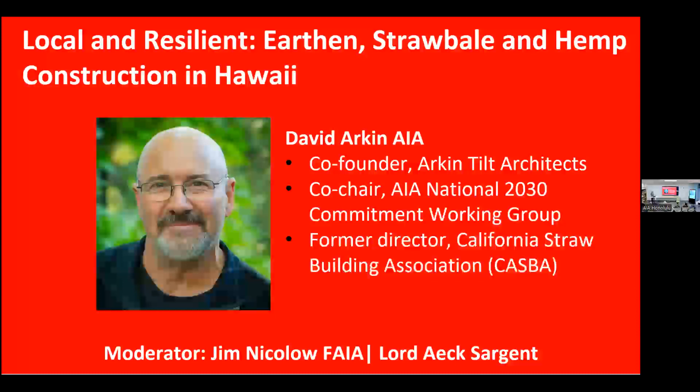As I was staring at the screensaver you put up, I realized the only mistake I made in preparing for this is not being there in person, as you suggested, which would have been much better. What a beautiful place you all live. I'm based here in Northern California, which is also beautiful, as there are many such places around the planet. And it's our job to protect these.

It was fun listening in on the opening. I felt like I was sitting at an AIA East Bay Committee on the Environment meeting with discussions of firm issues, all-electric, and lots of other good things we're all working on towards a better planet.

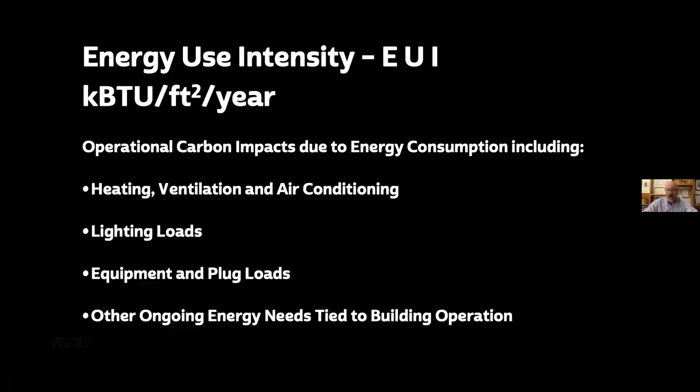I wanted to cover first briefly the operational side, or energy use intensity, which we're measuring as part of the AIA's 2030 commitment. That, of course, is carbon impacts due to HVAC, lighting loads, and other equipment and plug loads—the energy needs of our buildings on a day-to-day basis.

We again invite all of you, if you haven't already, to sign on to our 2030 commitment. I recently learned that there is a COTE chapter where, at one of their local gatherings, not a single person was a signatory to the 2030 commitment. I'm not going to name that chapter—I'm not going to shame them, nor you—but I do hope everyone becomes a signatory.

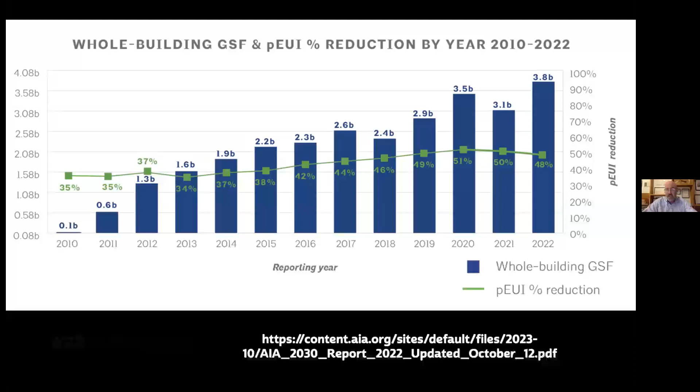This is from our most recent 2022 reporting year, where we achieved overall a 48% predicted energy use intensity reduction, over 3.8 billion square feet of buildings reported. You can see the progress we've made in increasing reporting in the program, and we're hitting a bit of a plateau around 50% reductions. We're hoping that as building electrification and a cleaner grid become priorities, those percentage reductions will continue to increase.

But net zero energy is a target we all have. Here in California, it's actually mandated that all new residential units achieve net zero energy through rooftop photovoltaics and a clean energy purchase agreement. So some of our zero net energy strategies—these are not anything new to any of you.

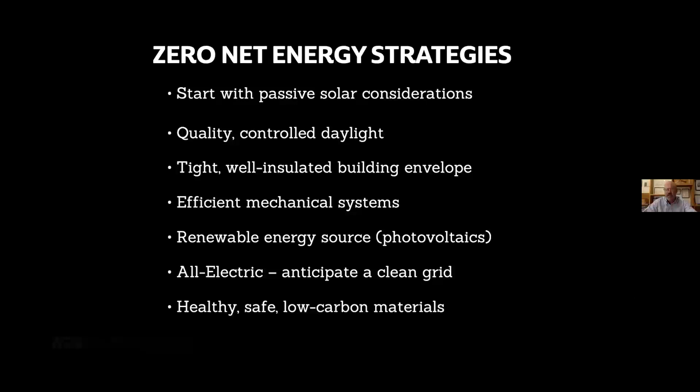Good building envelope, controlled daylight, ventilation—key in your particular climate—efficient systems, and healthy, safe, low carbon materials. That's really what this presentation and discussion tonight is all about: how can we achieve reductions in the 11% of our emissions accounted for in building materials, what we call the embodied carbon intensity, measured in kilograms of CO2 emitted per meter squared.

Embodied carbon is effectively the stuff that our buildings are made of, from the impacts of the raw extraction of the material, whether it's digging it out of the ground or cutting it down as a plant, the transportation of it, the processing of it, and of course energy used while it's being put together as a building.

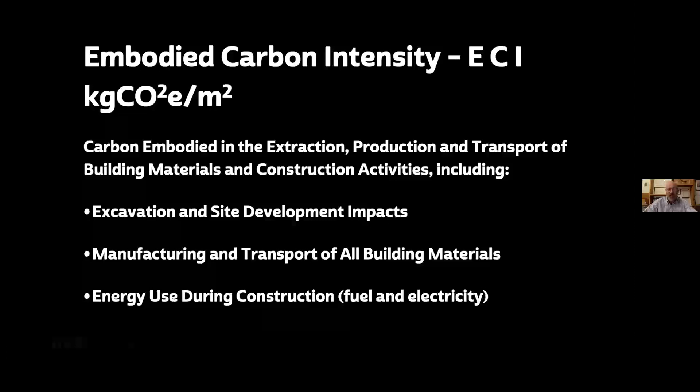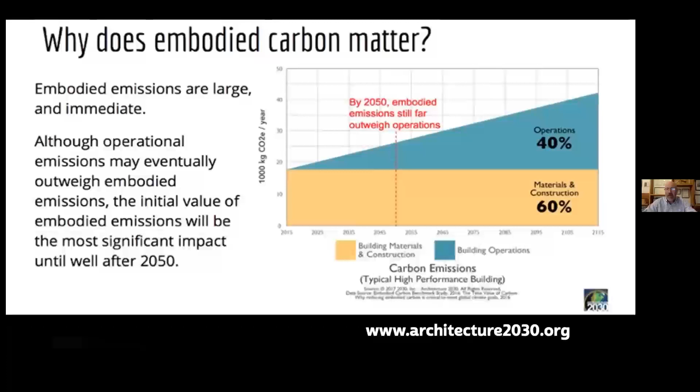It's a good question, why does this matter? For the past 30 years, we've made remarkable progress in increases in energy efficiency and integration of renewable energy systems in our buildings. But as we've done that over time, those decreased impacts of the operating carbon mean that the materials and construction are everything. Perhaps more critically, those impacts are up front—they happen before the door is opened and the building is being occupied. So again, as we decrease the operating impacts, everything is frankly materials and construction.

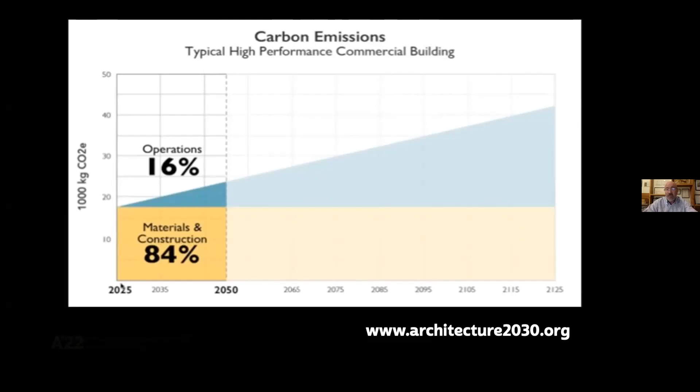As Jill noted, when you're in a remote location and much of the resources are being brought there from faraway places, there are transportation impacts. Granted, transportation of materials by ship is one of the most efficient ways that we can move things, but still, taking advantage of what's right there at hand is, of course, even better.

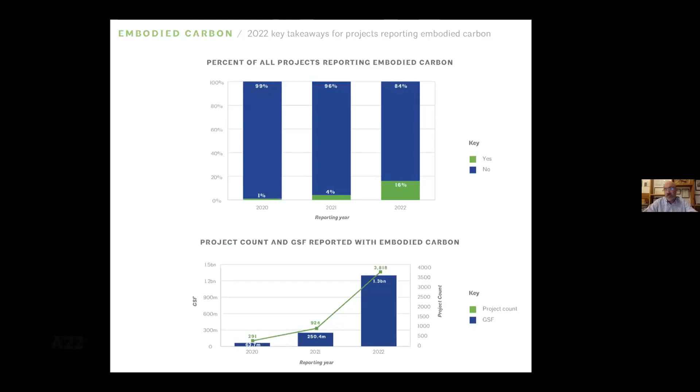Just to come back to our 2022 By the Numbers report from the AIA 2030 Commitment, the average building being reported—and granted a lot of these are large projects by large firms—is looking at about 550 kilograms of CO2 per meter squared average. Low-rise buildings average closer to 300, and single-family residential closer to 200 each. So we've seen a steady increase over the 3 years that the commitment has invited firms to voluntarily report their embodied carbon, and a fourfold increase in the number of projects reported from last year to this year.

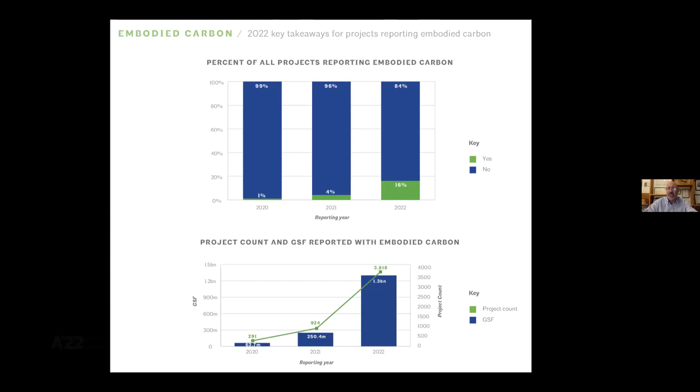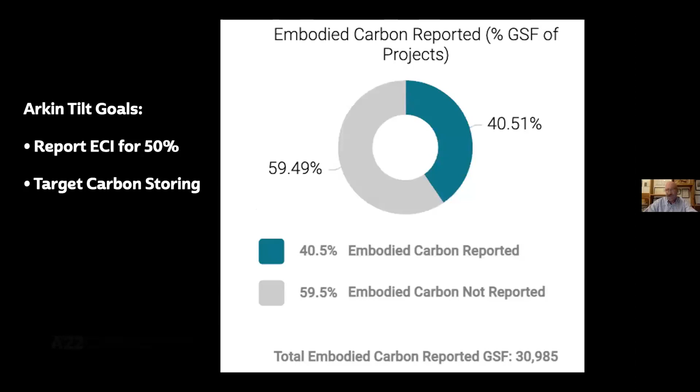Our own firm has set a goal of calculating embodied carbon for at least 50% of our projects, and we are aggressively targeting carbon storing for at least one of ours. I'll just note right now, it's extremely difficult to get to that place, but it's one that we really need to target and get to.

Just a very brief discussion on some of the tools that are available. We're looking at the life cycle analysis of our buildings, and it's really only a couple of the B phase—the operational energy and water use—that are not embodied carbon. Everything else is all about the materials, getting them to the site, repairing things over the life of the building, and then what happens at end of life. These are just a quick glance at a few of the tools that are out there in case you're not familiar with them.

The EC3 tool was recently brought into the Carbon Leadership Forum, and Building Transparency manages it. It's free and one of the most popular ones that integrates with Revit and other higher-end CAD programs. In our firm, we use Vectorworks, and they actually have a plugin for embodied carbon, and also the Beam tool, which is at a right scale for the smaller scale buildings that our firm is typically engaged in. Just wanted to give a quick glance at one of these.

This is the Building Emissions Accounting for Materials Estimator from Builders for Climate Action, and our friend Chris Magwood, who is now also with the Rocky Mountain Institute.

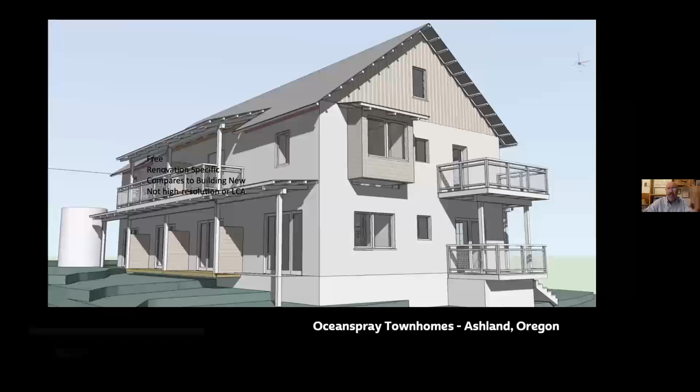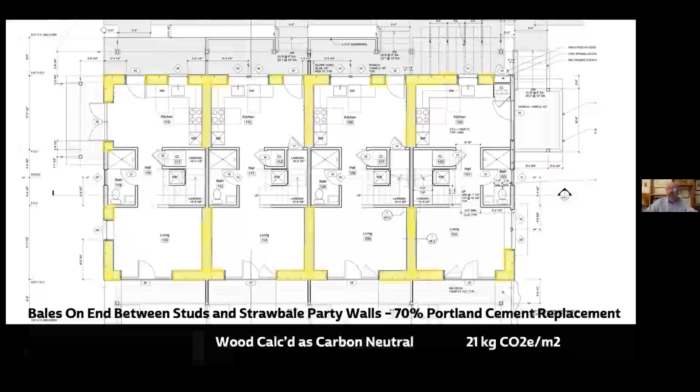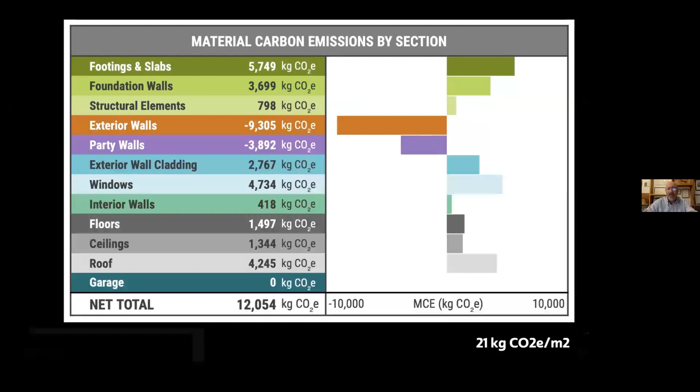Just an example of one of our projects: this was a townhome, 4-unit townhome project in Ashland, Oregon. Here we're featuring strawbale construction, not only in the exterior walls, but also we're able to get them as the party walls, the sound walls and fire walls between those units. That combination enabled us to achieve a mere footprint of 21 kilograms CO2 emitted per meter squared. So that was getting closer to zero, but not quite there, but a significant reduction over where we're at.

One of the nice things with the Beam estimator is the information that comes out the other end, some calculation of these metrics, and also just some sense of where you're at and where you need to be getting to. They interestingly put 300 at the high end, and as we saw, our current reported building average is even higher than that.

So, to some of the strategies that we employ in utilizing locally available natural building systems, and some of the ones that are available to you there on the islands of Hawaii. One of the resources that I would point you at is the Carbon Smart Materials Palette. This was created by the Architecture 2030 group in collaboration with one of the subcommittees, the Renewable Materials Committee of the Carbon Leadership Forum.

It is organized by discussion of first the higher impact materials and what better choices you can make within those, and then looking at some of the alternates and why they are better and potentially carbon storing.

First, to talk about some of these heavy hitters, the good news is that Portland cement, the basic ingredient in concrete, and concrete itself, is headed towards a great carbon reduction through the use of renewable energy in making the Portland cement, various admixtures that can reduce its impacts, and some exciting innovations in ways that it can actually store carbon.

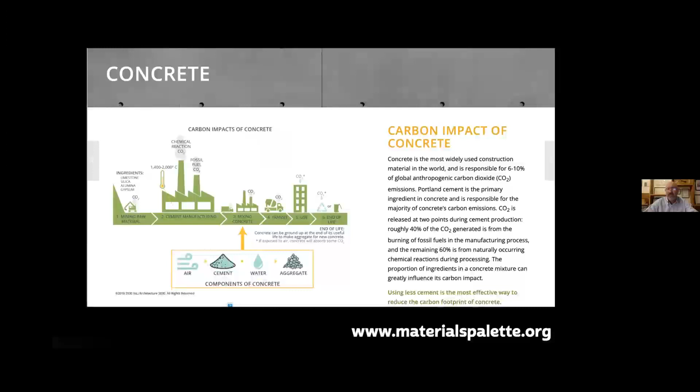We invite you to look at what your local concrete suppliers are doing towards making these reductions. We were able to take the local supplier in Ashland, Oregon, who had never done anything greater than I think 35% substitution of Portland cement with fly ash, and used a 70% reduction substitution. So it's our job, as we said, to move the needle on these things.

Just a few of the earth resources available to us as architects. Traditional rammed earth - some of the oldest cities in the world were built of rammed earth. In seismically active areas, that earth is typically stabilized with some amount of Portland cement or lime. This particular project is in Santa Fe, New Mexico, and we featured it as part of a thermal mass wall on the interior of the building, and also a kiva fireplace.

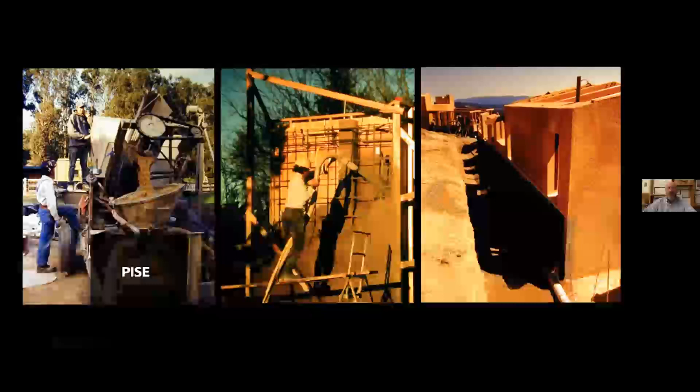A variation on rammed earth is a sprayed version - the same mix, but applied using gunite technology, where the dry material is moved through a tube with air, and then water is mixed with it right there at the nozzle. Very little water means a much drier application, which can lead to higher strength, and it could be shot in place, screeded off, and be very stable in that particular moment.

David Easton, who developed a lot of these technologies in Northern California, sadly passed away a few years ago, but one of his last innovations was developing an earth masonry unit. It has the same properties as a concrete block and can be built with in the same way, but using significantly less Portland cement in its mix. Here's one of our projects using that.

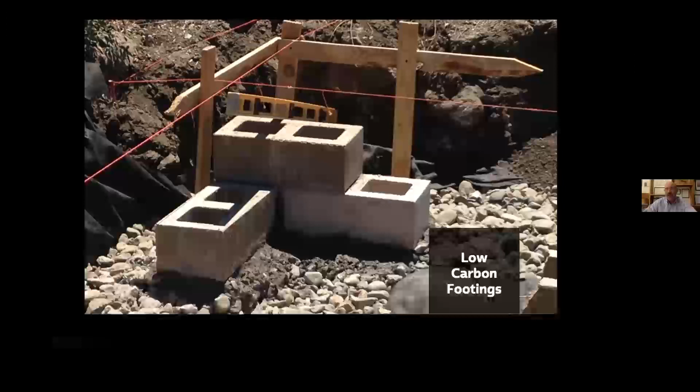We've utilized those same blocks as part of low carbon footings in our buildings, again realizing that concrete does have a role. It's very good at being connected to the earth, not rotting, and supporting our buildings well. But if we can use less of it, and in certain instances come up with some innovative alternatives, that would always be welcome. Our engineers are supporting us in using what's commonly known as rubble trench, some type of compacted gravel, to substitute part of the depth of the required footings.

A friend, an architect in Bali, Jeni Kardinal - you'll see some of the other work Jenny's done on a tropical island, which I thought was very appropriate to share with you here this evening. She uses a system from Darcey Donovan, an architect and engineer here in Northern California, who did a lot of innovative work bringing strawbale construction to Pakistan post-earthquake. She does footings, and in this case wraps them with some form of mesh. In Bali, discarded fishing nets were a commonly available resource, and they can be wrapped around the base of the footing and then brought directly up into the plaster finishes to create a seismically sound connection between the two.

Our firm has been doing more and more projects with clay floor slabs, and I am guessing that you have access to clay because there are very few corners of the earth that don't have clay within a 10-mile radius of them. On this particular project, it was found on site, as we have in just about all of our projects. And if it's not directly on site, it can be found not too far away.

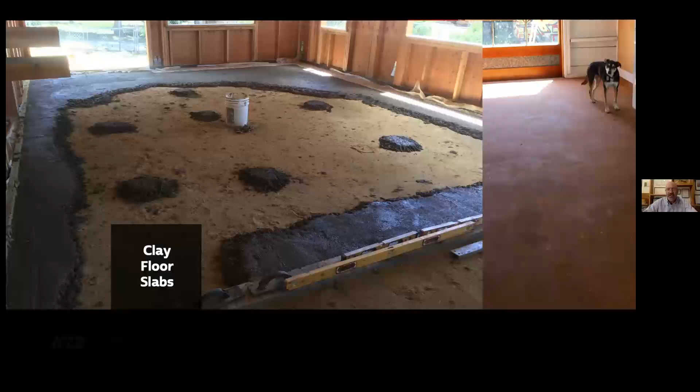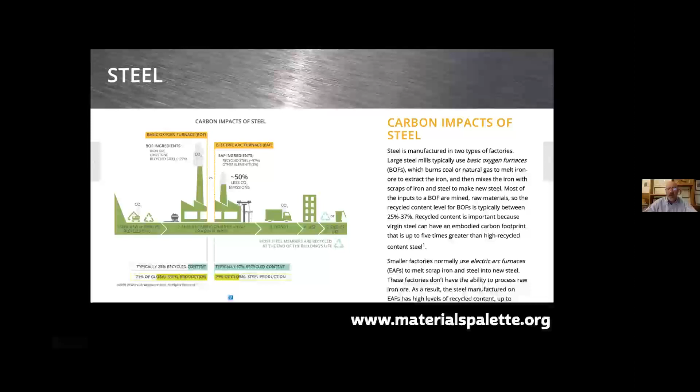Returning to some high impact materials, steel is common in our buildings. The good news is that there are steel manufacturers working with renewable energy resources, one in the Pacific Northwest which is largely hydro-powered electricity-based steel, using recycled resources and less energy in manufacture or remanufacture.

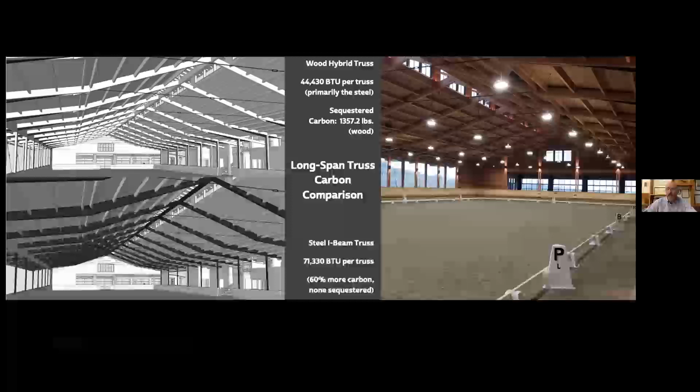In one of our projects, we compared a straight steel I-beam truss versus a hybrid using some steel along with quite a bit of wood. We presented this to our clients, and while the wood hybrid was actually more expensive, they liked it better from a carbon perspective and also liked the look of the wood better than the straight steel. So some savings in carbon emitted by choosing wood instead of steel to some degree, with steel still being used because it has excellent properties, particularly in tension.

Returning to the carbon smart materials palette, just a few of the resources discussed there, and a few of these we'll be looking at here this evening.

So why are we so excited about plants as a building resource? Very simply, they're one of the most efficient ways that we pull carbon out of the atmosphere. The planet and its living systems pull carbon dioxide out of the atmosphere through photosynthesis, release the oxygen, and store the carbon in the plants themselves, as well as a good amount that gets drawn down into the soil.

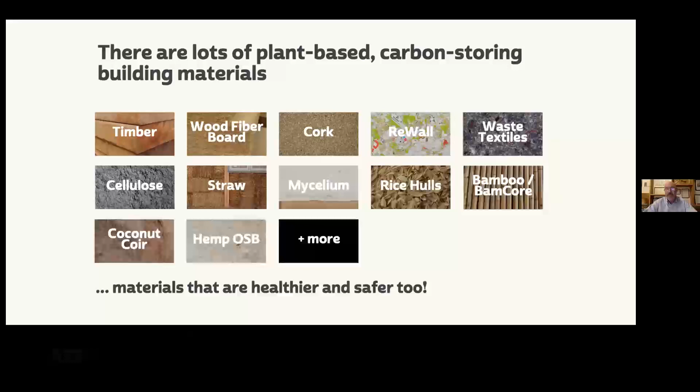The good news is that there are a lot of plant-based carbon storing materials out there, and they are generally healthier and safer as well, and can be found, grown, harvested locally in many cases. Just to pick on one example, grain straw—there's enough grown globally to meet all of our insulation needs, as well as offset all transportation emissions. So these resources are ubiquitous and plentiful.

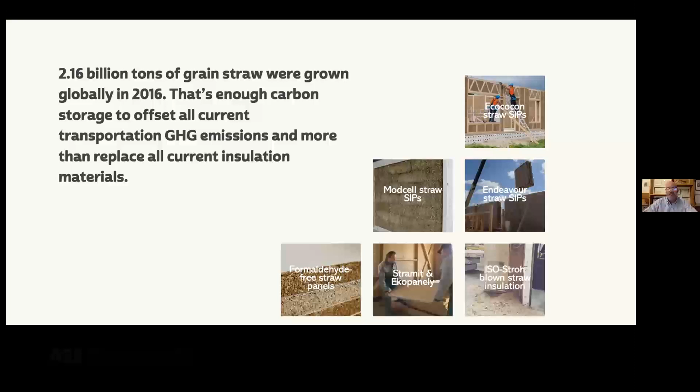While wood is the most commonly thought of one, there are others on a more rapidly renewable cycle: straw, bamboo, and hemp, which is what we're discussing here.

Starting with bamboo, this is an example of the work of a Colombian architect, Simón Vélez—just amazing structures employing timber bamboo.

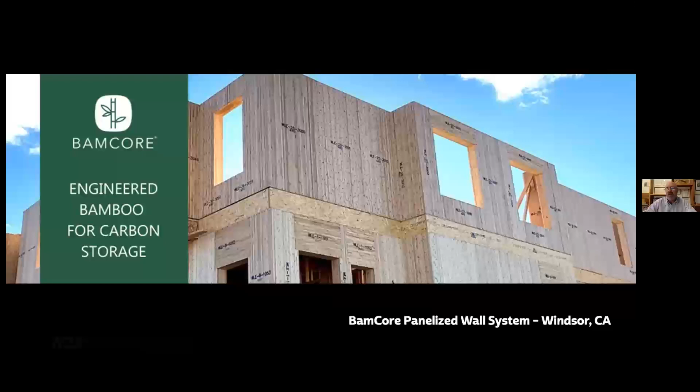Here in Northern California, we have a company taking that timber bamboo and laminating it as part of a panel system to create strong buildings that are structurally supported with both an inside face and an outside face, with no need for studs. So it's a perfect wall in terms of thermal transfer and a utilization of a rapidly renewable carbon storing resource. This is an example of a home here in Northern California built with that BAMCore wall system.

Talking a bit about bamboo and straw, again Jeni Kardinal, an architect on Bali, was able to utilize bamboo as part of a project they did there, but cautions that bamboo does need to be treated so it's not susceptible to both moisture damage and insects.

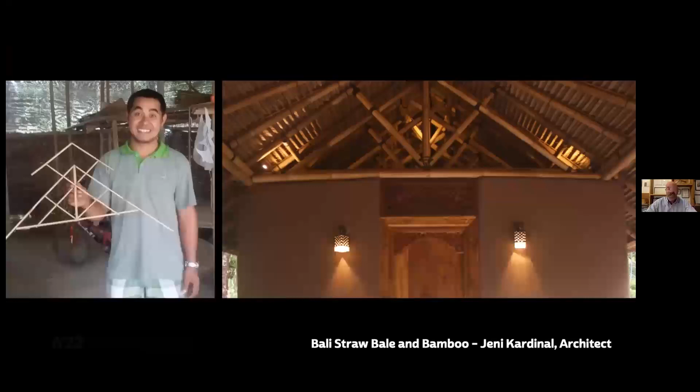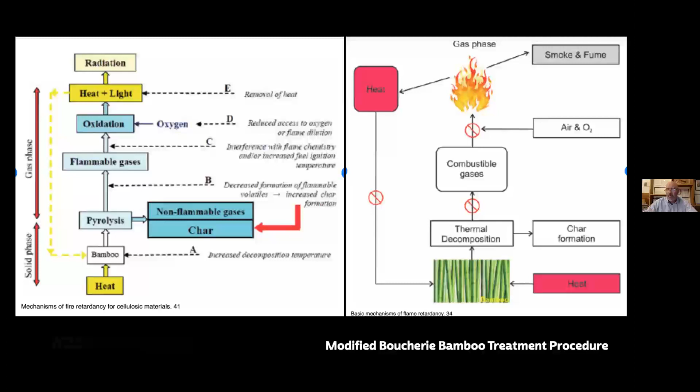She was quick to note that nothing eats rice straw in her experience, but bamboo does need to be protected. The method they recommended is the Boucherie bamboo treatment procedure, which is the addition of borate and boric acid introduced to the bamboo, at a rate of about 5 minutes per meter, and it was very effective.

So bamboo could be a resource there on the islands, just cautioning that it needs to be used with some form of treatment.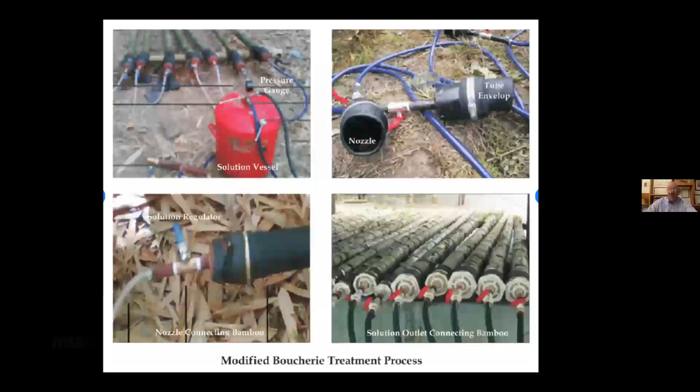Turning now to hempcrete as one of the forms of building with hemp. This is a process where the hemp hurd, the starchy center of the stalk left over after the primary fibers used for growing hemp are removed from the outer surface of the stalk—decortication is the process by which those fibers are removed—and then what's left in the center, that starchy bit, can be chopped up and mixed with a lime binder. Various types of lime can be used, mixed with water, and then placed into formwork, not unlike the way rammed earth is done, though typically done around studs or some other structural system.

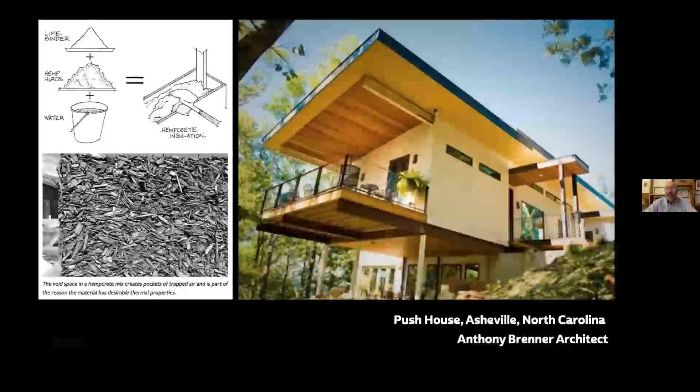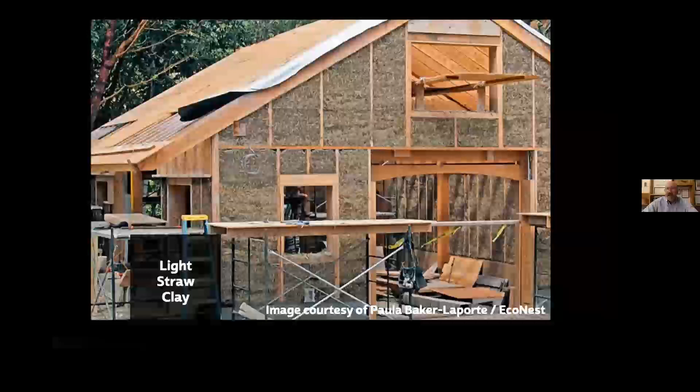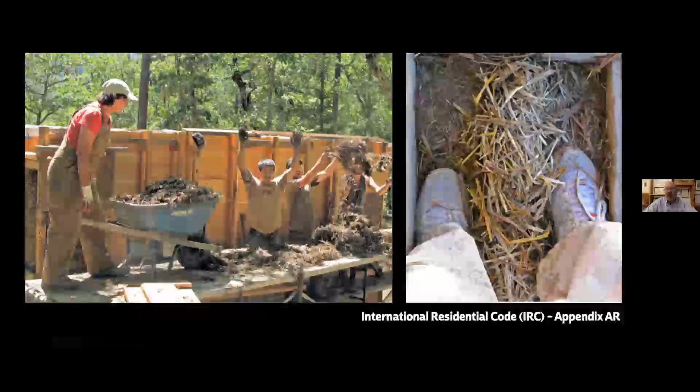Somewhat of a variation on those resources is light straw clay, where loose straw is dipped into a clay solution and similarly tamped into formwork. Typically, formwork starts at the bottom of the wall and moves its way up, and it dries and is stable enough as one goes to be able to simply lift the formwork over the course of the setting of that raw material.

Light straw clay is in the International Residential Code now, in Appendix AR, so there are guidelines for code officials to look to if you're considering doing this.

Our friend Paula Baker-Laporte has done a lot of beautiful work with a hybrid of timber frame construction and light straw clay. This particular example is in New Mexico, but she and her husband Robert, who's a timber framer, moved to Oregon, a more moist Pacific climate, with great success.

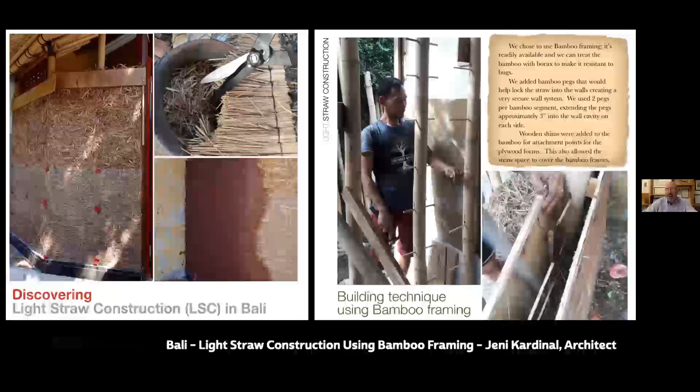In Bali, Jeni Kardinal has been working more with light straw clay than strawbale since that initial project, in part because they are not baling their straw, so it can be utilized as a resource more directly out of the field. She feels encasing it in the clay slip is an even better way to work with the material.

Happy to say that members of our California Straw Building Association happened to be at the International Code Council hearings when it was discussed, the possibility of removing adobe from the building code. It's been there since the 1940s, and it is still there today because they were there advocating for strawbale and light straw clay.

So now we'll turn our attention to our favorite building material here in our firm, strawbale construction. We like to say we have many tools in the toolbox, but I will admit that this one's by far our favorite.

Strawbale is not our invention, nor is it new. It is, however, a uniquely American invention. So like democracy and jazz, we've exported it all around the world, and I think it's one of the great contributions that we've made and continue to make. It was started in the Great Plains in the late 1800s, about the time that baling equipment was invented, and some clever individual realized that we had these big fuzzy bricks that could be stacked up to build the walls of buildings, and strawbale construction was born.

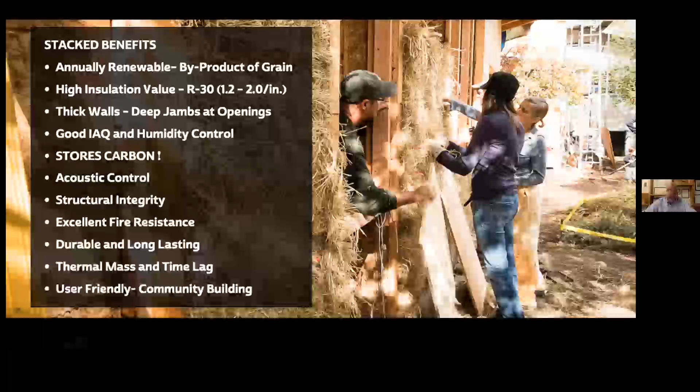Many, many benefits. I won't go into great detail on all of these, but I think the one we're currently most excited about is its ability to store carbon as a rapidly renewable resource.

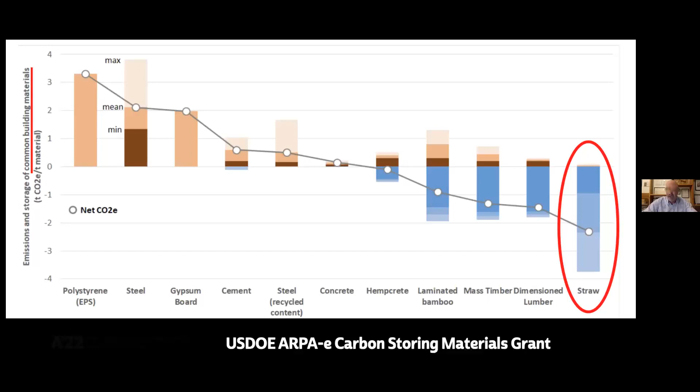How does this work and to what degree? Well, remarkably, for every pound of straw, 1.62 pounds of CO2 are removed from the atmosphere, because of the release of the oxygen and the storing of the carbon. Your typical home is going to store roughly 10 tons of CO2.

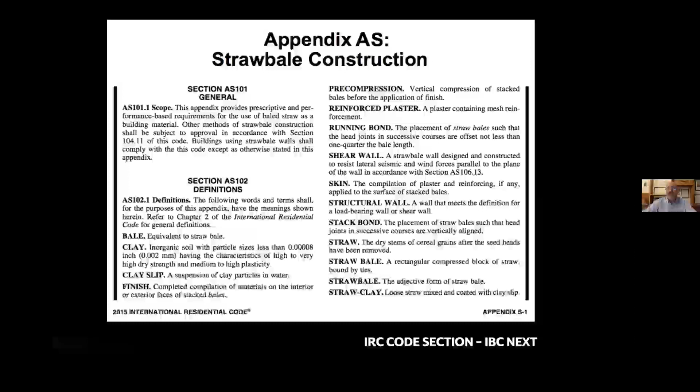Strawbale is also in the International Residential Code—it's been there since 2015. Our team of code people at CASBA are working on getting it into the International Building Code, but we've done several non-residential, commercial, and institutional buildings, and have been able to point code officials to this section, and they see it as something they can rely on because it came from the International Code Council.

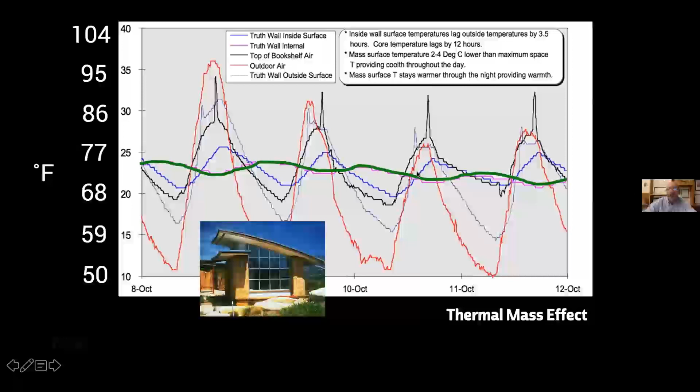One benefit I'll specifically mention is what I think is the real key to the success of strawbale construction in creating thermally comfortable buildings: there's a 12-hour time lag in the transfer of heat from the outer surfaces of the strawbale wall to the center. That inverse green line measures the center of the wall relative to the diurnal temperature swings of the exterior, going from the 50s well into the 90s outside, but staying between 70 and 77 degrees on the interior. So that thermal mass effect is not to be underestimated.

Worthy of mention, especially given recent disasters in your region, is the fire safety qualities of strawbale construction. It has been tested to a 2-hour fire-rated wall, with lime plaster on 3-string rice strawbales on edge.

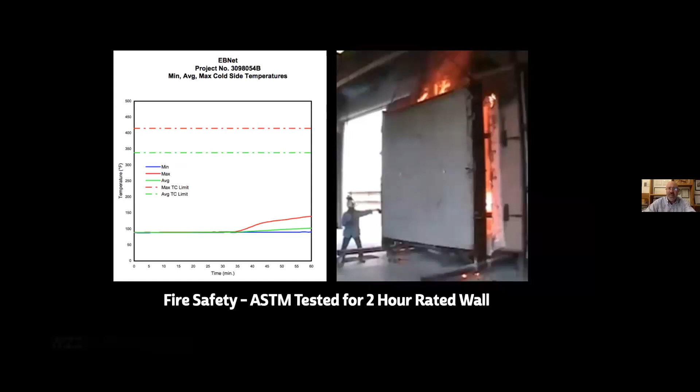My wife and partner, Annie Tilt, and I are currently engaged in a fire rebuild project of our own. Unfortunately, we had a shared family property in Sonoma County that burned in the Glass Fire of 2020. But we're in the process of rebuilding and have quite a few fire-safe features as part of this project.

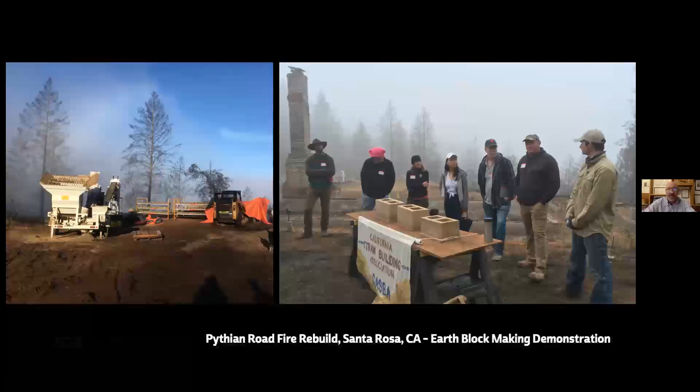We're also able to utilize a lot of locally available resources, starting with Earth Block, the watershed block now known as Ecoterra Block, for the foundations. Our project started by hosting a portable block-making rig demonstration created by the Rammed Earthworks team, and it was fun to make the blocks on site.

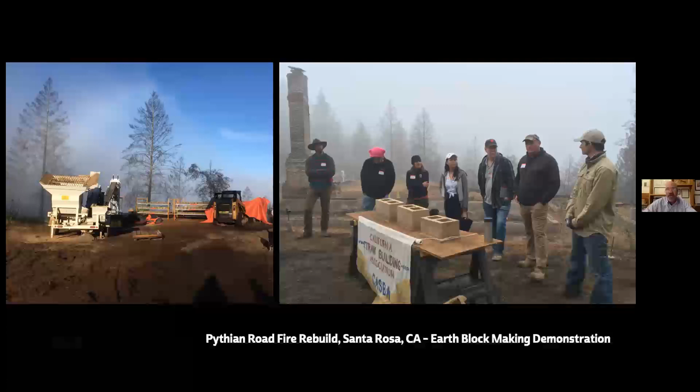The raw material for the soil came from a quarry about 10 miles away. They refer to it as watershed materials because you should be able to find a resource to make block with within your own watershed. So we utilized quite a bit of that as part of our new foundation.

We were also able to take several Douglas fir trees that were killed in the wildfire, and within a few years, before the beetles really set in, that timber can be utilized. So while some trees were cut and hauled off site, some of the site lumber was harvested and milled in place. We had to hire a timber grader to come out, look at all four sides of every piece of wood, and stamp it before we could utilize it as part of our rebuild project.

This rebuild project features a sand bed utilizing solar hot water collectors, circulating that heat in a 2-foot deep insulated bed of sand. We insulated underneath that space with pumice, and we've started substituting pumice for foam insulation board wherever possible. You just need to use a little more of it, but it's a stable substitution for base rock, with insulative properties of about R1 per inch.

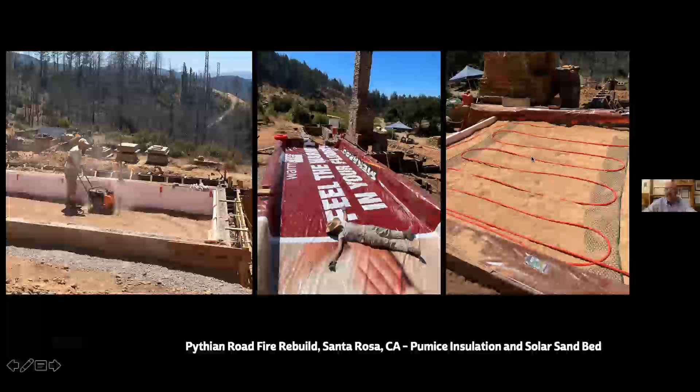In a webinar that I gave to Fine Homebuilding on building in high-risk fire zones, we highlight a lot of the survivors.

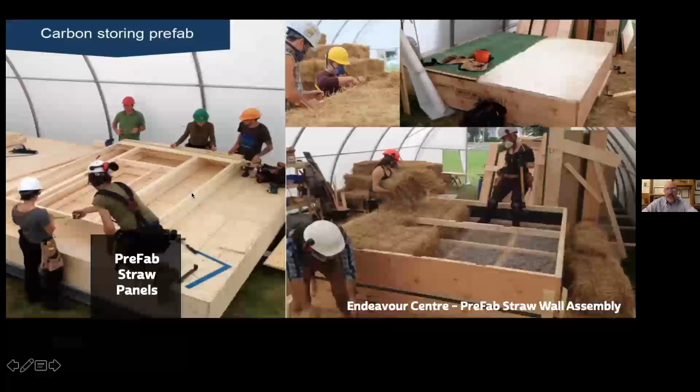If you're doing any projects in high-risk fire zones—and as the fire marshal in California quipped, nearly every acre is becoming a high-risk fire zone—it's something to be cognizant of and take to heart with every project.

Just to go a little deeper on where straw bale and timber is headed, I think taking this technology to scale really relies on turning them into building products. Prefabricated panels show some of the greatest promise. This is the Endeavour Centre in Ontario, putting panels together.

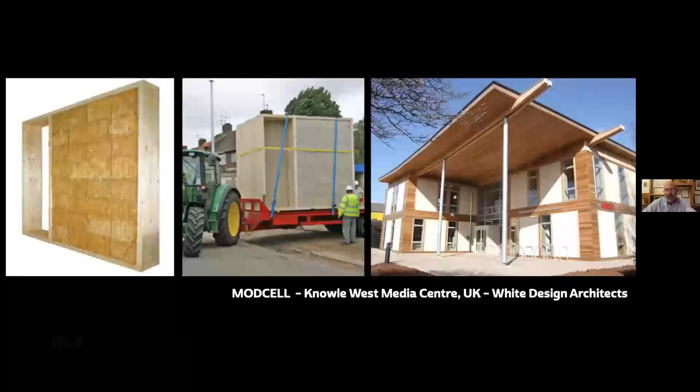ModCell is a similar product in the UK, where they have a timber frame and straw bale infilled. They usually utilize a window unit as a part of each panel.

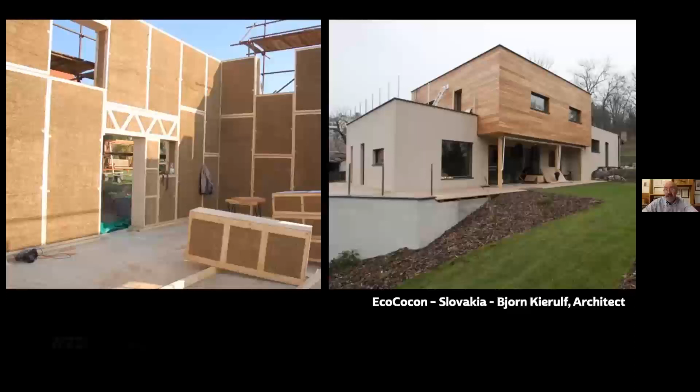EcoCocon is being fabricated in Eastern Europe. Bjorn Kierulf is an architect there who has created a factory-based system, and we're excited to bring that to the West Coast. There have been a few other North American projects, but ours is, I believe, the first in a seismically active area.

So this is a new residence with an accessory dwelling unit in Palo Alto, California. We worked with their factory people to build a SketchUp model—that's the interface they use to get the proper dimensions on all of the panels.

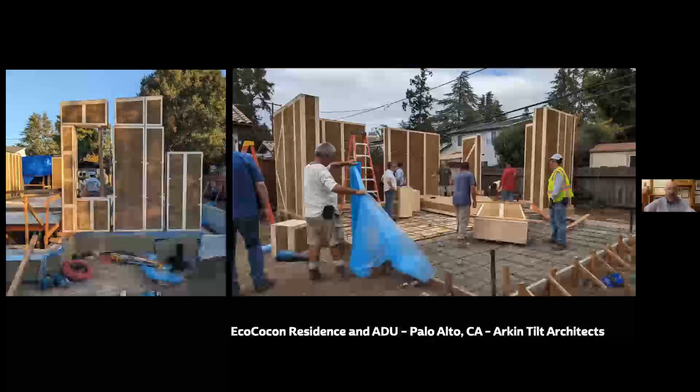Those were shipped by boat and then train, and then the last mile by truck from the Oakland shipping port to Palo Alto. And here they are being assembled on site.

Returning to straw bale construction in a tropical climate, again, architect Jeni Kardinal in Bali created this beautiful example utilizing nearly entirely, well, no—it is entirely locally procured resources.

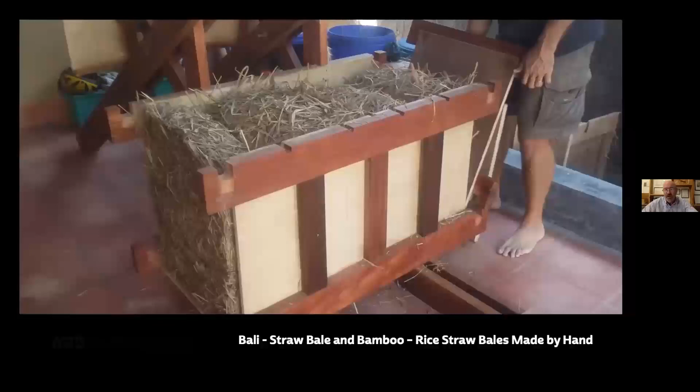Starting with the straw bales, rice straw, and it is her firm belief that rice, because it grows in a high moisture environment, is actually a superior choice. Fortunately, there's quite a strong rice culture there, so it is being grown, and I suspect it's being grown on the Hawaiian Islands as well.

However, it's grown in Bali in paddies, and harvesting rice with a straw bale baler is not really an option. So they utilized a rig pioneered in Pakistan to make straw bales by hand. Here you can see that work being done, with great care being taken to keep them dry.

The simple rules with straw bale construction are good shoes, good hat, and a coat that breathes. Good shoes is a foundation that keeps the bales up away from the ground. In Bali, they actually made a taller foundation than was required, toward that effect and dealing with heavy rains. A good hat is a broad overhang, and you'll see in the finished product the timber bamboo trusses cantilever out quite some distance to keep most of the wind-driven rain off the building.

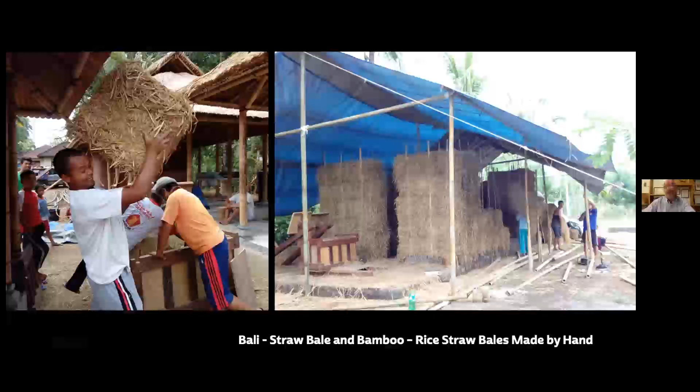And finally, a coat that breathes is a vapor permeable finish that allows for moisture to get in and get out again. Jenny notes that they've measured the moisture content at 17 to 18%. Sustained moisture content greater than 20% is when we begin to see dry rot happen in wood products—it's also where we see compost begin to take place in straw bale.

So quite effective. Here, a local clay plaster was mixed with cactus juice. In the recipe book for the cactus juice, it suggests that you should utilize it within 3 days, but they found that it should be used within a single day, or it really begins to go bad and smell awful. Jenny has also worked with cow poop as an admixture to create greater adhesion, stickiness within the clay plasters.

Really just a beautiful example of well-ventilated natural structure in a tropical climate. So I was very grateful that Jenny was able to share some of this example with us.

Returning to other carbon storing resources, ones that we're all perhaps a little more familiar with and comfortable building with, is wood. Here at our Esalen Institute project in Big Sur, we utilized a lot of FSC certified lumber along with salvaged resources, while the roof spanning trusses here are new glulams. The ones on the wall and the ones that created the bench were salvaged from part of the building that was demolished.

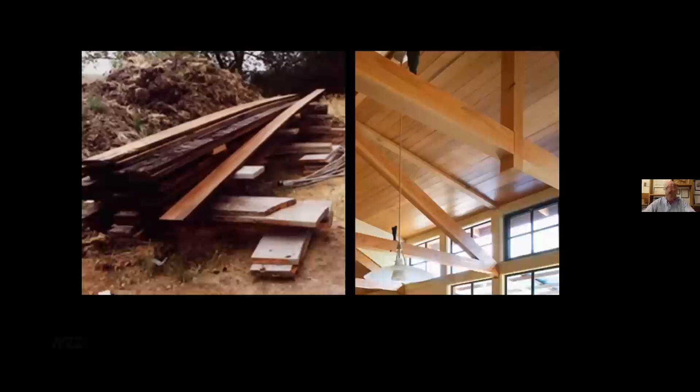And then the redwood spent most of its life growing in California, then made pickles as part of pickle barrels in New York, and currently in Wisconsin a woodworker friend has it, but we contracted with them to make the acoustic ceiling panels, so brought that redwood home. Again, being conscious of the forestry practices behind those materials, looking to salvage resources wherever possible. This is vinegar barrel material utilized.

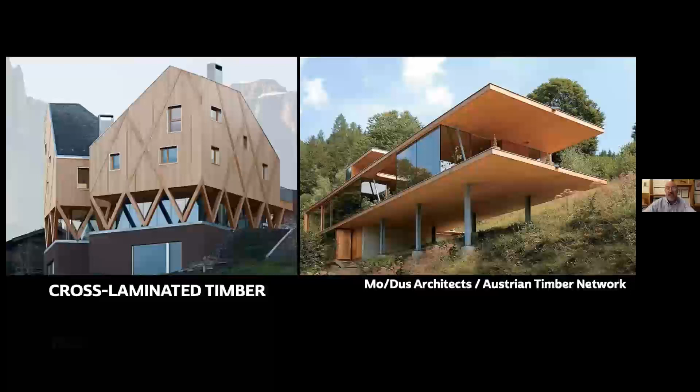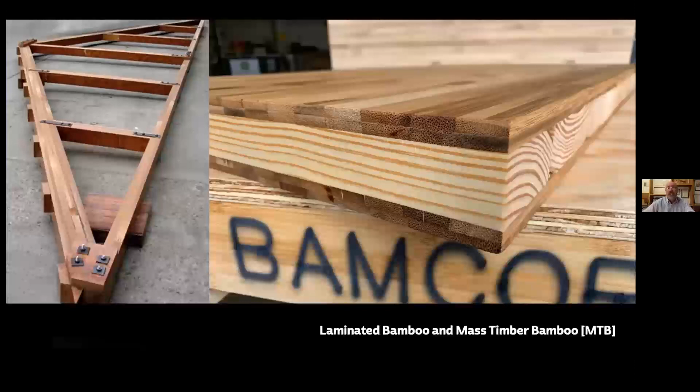Tall timber is becoming more and more common. This is a 9-story building in Minneapolis. There's a 21-story building just finished now in Milwaukee. Cross-laminated timber is a way of utilizing wood resources to create spanning capabilities, utilizing a lot of that storage. But of course, we don't have enough wood to meet all of our needs, substituting for concrete and steel. So we're looking to perhaps laminated bamboo and lesser utilized wood resources such as eucalyptus to create mass timber or mass bamboo products.

Next, I want to turn to some of the best opportunities to utilize some of these plant-based resources. That would be in the form of insulation products. There is a whole section in the materials palette dedicated to insulation, and you can see the relative carbon emitting impacts of a lot of common materials that require energy and petroleum-based resources in their manufacture, and sometimes greenhouse gas emitting compounds in the blowing agents.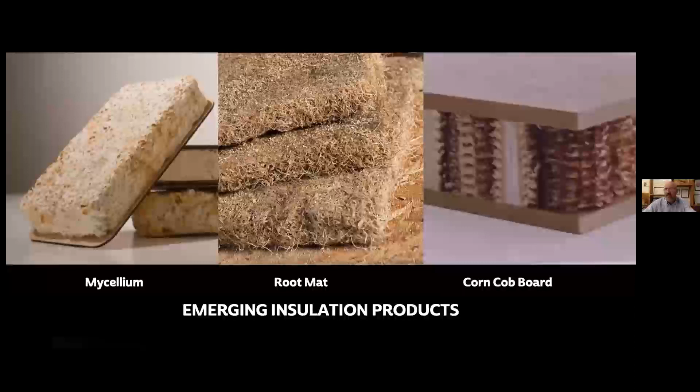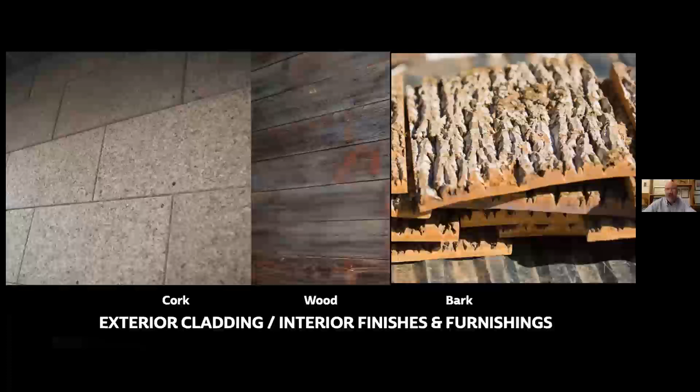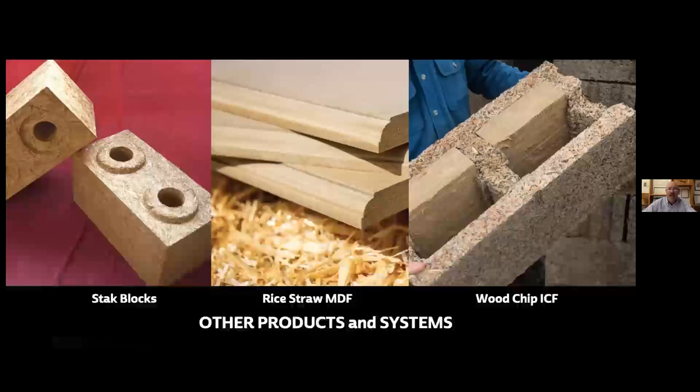Faswall or Durisol is a wood chip based insulated concrete form. Stak Block is a compressed straw product, and there's a rice straw MDF available in Northern California. We utilize this for the wall finishes in a recent farm worker housing project. The wall on the left is strawbale with a lime plaster, but the wall on the right, shown in detail, is this rice straw based MDF with a sealer on it. And that's that farm worker housing project.

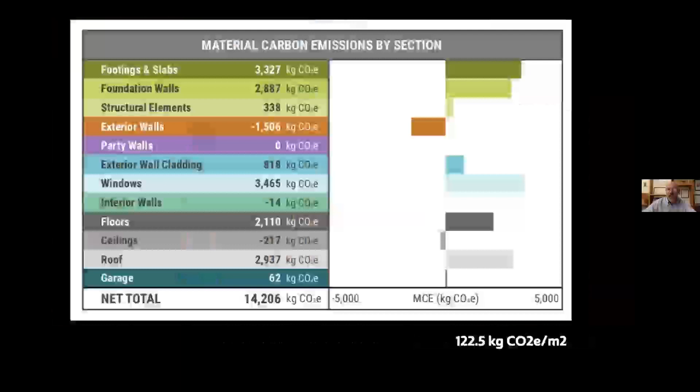Once again, the BEAM calculator - we were able to show how much carbon storing we could get from those exterior walls and the cellulose insulation in the roof, but not enough to offset the impacts. One of the nice outputs from the BEAM estimator is it highlights where some of your higher impact materials are, and we were somewhat surprised to find the aluminum clad wood windows, both the glass and the aluminum cladding, added up to the highest impact in this particular project.

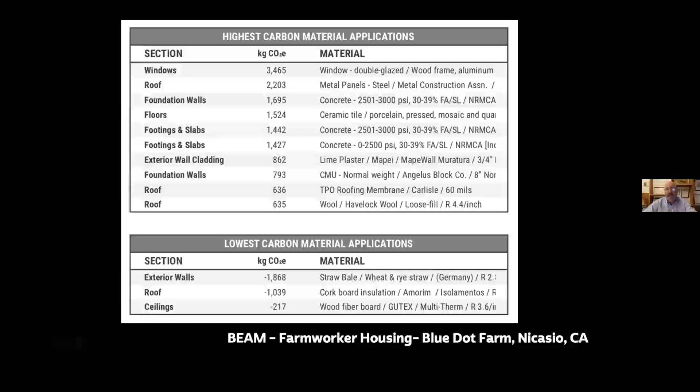So where we're hoping to get with these materials and carbon storing in our buildings is a hope that buildings - which, if there's anything we humans are going to continue doing, it's creating shelter for our growing needs - may become the Earth's 6th carbon sink. I won't detail what the other 5 natural ones are, but that's our goal.

Just to wrap up with a few examples of projects that have targeted this and integrated some of these materials. This is a 34,000 square foot mixed use office, warehouse, and production building in Eugene, Oregon, remarkably built for $147 a square foot.

And in the straw and wood frame walls, we were able to store 10,000 kilograms of CO2 versus what would have been, I think, closer to 70,000 emitted if we'd done steel studs with fiberglass and a foam insulation wrap.

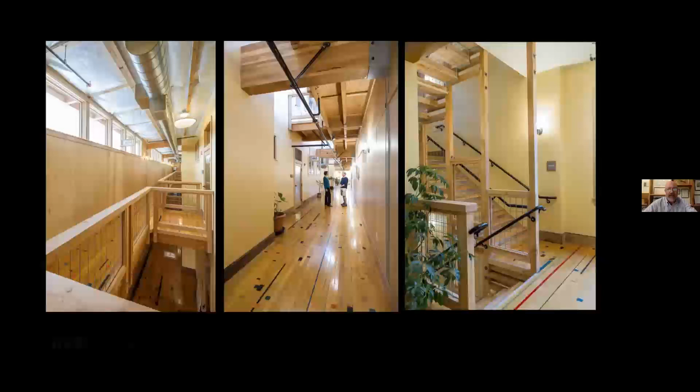So the two upper floors of the front of this building are what feature the strawbale and clay insulation on the interior. Just a few other salvage resources worth mentioning: used windows along this interior corridor where daylight is allowed to penetrate into the backside of those offices, used gymnasium flooring for the hallways, and offcuts from a local cross-laminated timber factory that we utilized as stair treads.

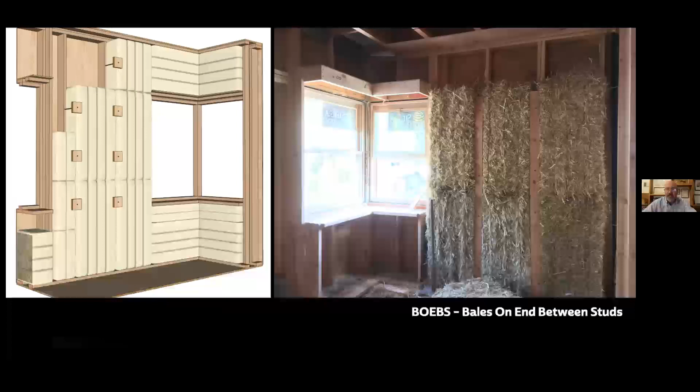Then the bales here placed on end between studs, what we call the BOEBS system, held in place with plywood strips and long screws, and then finished with a clay plaster.

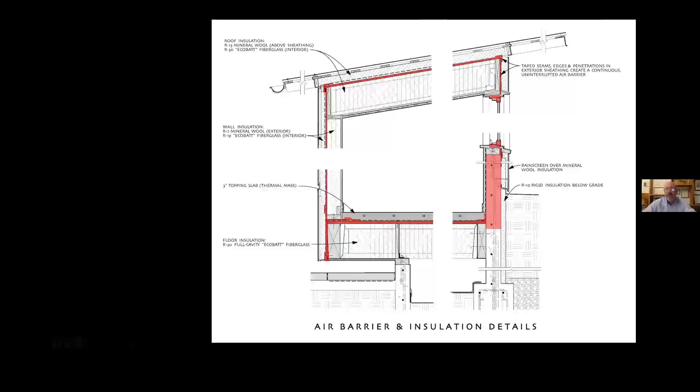Here we utilized a mineral wool wrap of the building, so not a carbon storing resource, but one that actually has some pretty significant fire resistive qualities that were important in this particular location. And then again, various solar systems providing free heat on the hot water and all the electricity the home needs.

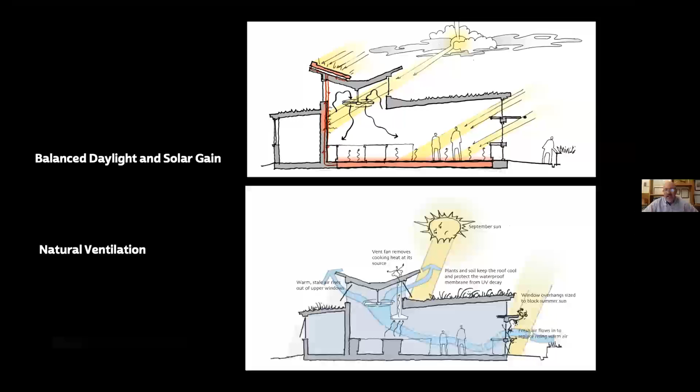This next example is a middle school classroom in Carmel, so coastal California, and again, integrating both solar hot water collectors and photovoltaics. Careful attention paid to daylight and balancing solar gain with thermal mass, and then utilizing natural ventilation, which is, of course, one of the great tools that you have in your toolboxes.

But this was a light monitor near the rear of the classroom that allowed for that balanced and bounced daylight as well as ventilation. And then the classroom itself opening up onto a science and cooking garden habitat features these garage doors that can literally open the building up and connect it to its landscape, which is something that I believe all buildings need to do a better job of.

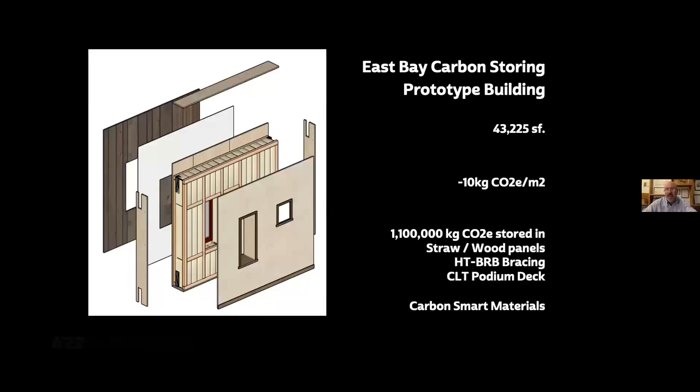We targeted a carbon storing project in the form of a prototype, which I do hope to see some variation of this built one day, but this is 3 stories of residential over retail and parking podium, designed as an infill project for here at the Bay Area, and utilizing aggressively low cement concrete, substituting other things for concrete, including some of the earth block, CLT podium deck, strawbale walls and for insulation and other products, and then utilization of wood and hybrid wood buckling resistant brace frames for the seismic bracing of that ground floor.

And we're able to show on paper a predicted carbon storing of 10 kilograms CO2e per meter squared. Great project funded by our local waste management authority and partnered with Arup and our structural engineering partners.

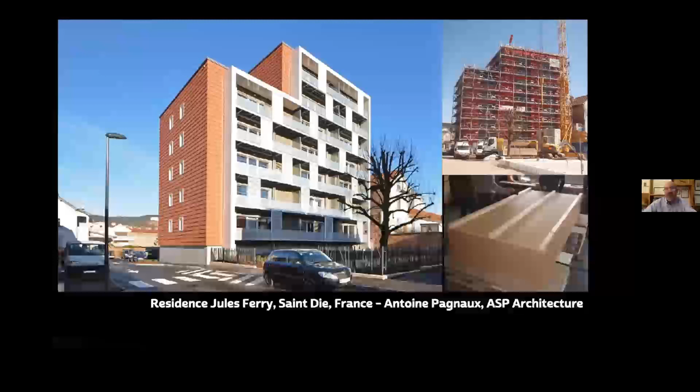And just to show an example, this is not one of our projects, but a 7-story housing project in France, where they utilized straw bales encased in wood fiberboard boxes as part of the insulation and cladding support system, and otherwise utilized a CLT floor and wall structure, and showed that the wood and straw in the building far offset the emissions of the concrete and steel.

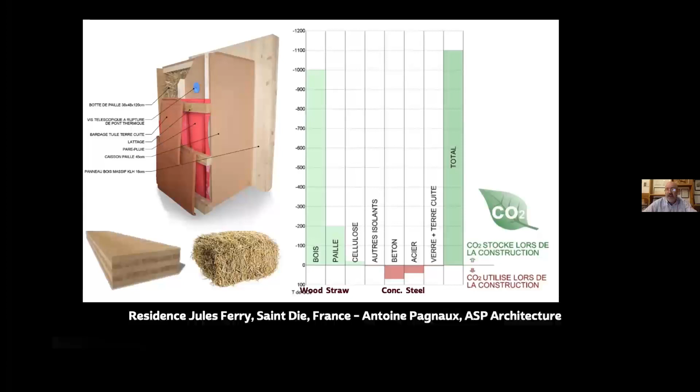And you can see in this diagram that even if you considered the wood to be a carbon neutral resource, that straw alone did the offsetting of the concrete and steel.

So if there's nothing else I want you to take away from this discussion this evening, it would be these 7 words: build shelter, not too big, mostly plants. And my thanks and apologies to Michael Pollan, who wrote a similar phrase for his food rules book.